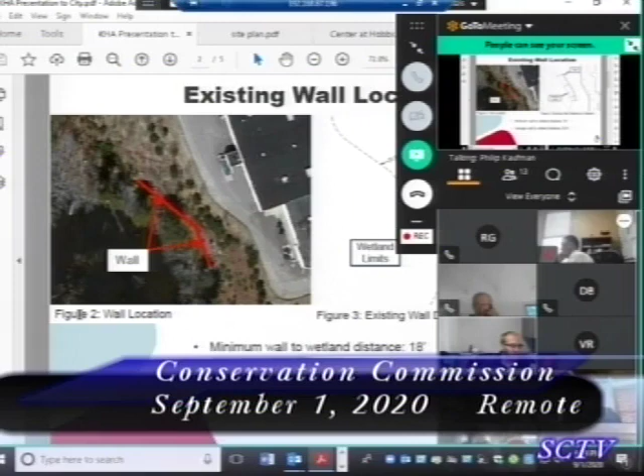So we had one of our biologists in the Northeast go out and actually flag. Those flags still exist there today. This was only done a couple weeks ago. And what we found is that, of course, the wetlands vary in shape and their relation to the wall, but in the absolute pinch point, which is towards the bottom, the second to lowest dimension there, there's about 18 feet today from the edge of wetlands to the face of the wall. And of course, that is the pinch point, right? So it certainly gets larger to 29, 32 feet. So what we found is that our minimum wall distance under existing conditions is 18 feet, and our average wall distance to wetland is 23 and a half feet. Moving forward.

So we wanted to go over some background first, and maybe this is slightly out of order because the next slide is really going to go over our proposed wall, the design, the construction, things like that, and the last two slides. But without giving it away, at the next slide, I'm going to turn it over to the GCS team to do a more thorough explanation of the type of wall we're proposing. But what I wanted to show here is, and again, we'll explain this in just a minute, the type of wall and what it's going to look like.

But essentially, we're going to be building a new proposed wall 10 feet in front of the existing wall. And so, where we had 18 feet from the wall to the wetlands in existing conditions, simple math, subtract 10 feet. Our new minimum is going to be 8 feet, and that average, as opposed to 23 or whatever it was, is going to be 13.

But the other thing we really want to point out, and the message we want to send with this one, is that as we do the construction and installation of this new wall, we have some really nice photos in the last slide that show that all of the construction equipment and vehicles are going to be on the, I guess, east or plan right side of the wall. So as they're building up walls, the construction equipment is going to be in that space in between the two walls.

And why that's really important is because the actual room that we need for constructability and for our equipment between the wall and the wetland is very, very minimal. It's only a 5-foot buffer that we're going to need in front of the wall, meaning that if the commission is okay with our design and open to the wall that we're proposing here, we feel very comfortably that we will not actually impact the wetlands physically during construction, and that we would have a minimum space of 3 feet beyond construction, but really closer to 8.5, 9, and more feet in the vast majority, the average being 8.5 feet.

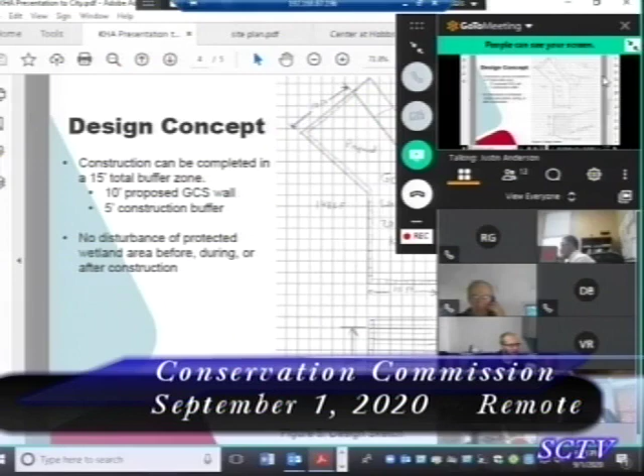So it's pretty simple. We can do it in lots of different weather conditions. It involves a basic 3-step process. You lay a layer of geotextile down, put a block near the edge, and then backfill with stone, and then compact with either a roller or plate compactor or some other equipment, and do that in 8-inch lifts as you come all the way up to the full height of construction.

So we were able to do these in pretty confined spaces, and I think the design would lend itself to being able to work in a very tight footprint, and I think we're limiting ourselves to about 15 feet to give ourselves a little safety factor against the edge of wetlands that Kimley Horn mapped. So, does it step back as it comes up, Justin? Only slightly. We can almost build these straight vertical. We can step them back slightly, but it's very slight. Okay.

So we wanted to certainly take questions, but just to provide just a tiny bit more context. So the goal here is to make sure before we jump in and spend a lot of time and effort putting together actual design and permit drawings to formally submit to the commission and to the city, we really wanted to gauge thoughts, answer questions, make sure that we collectively as a group today have at least some element of comfort that we're okay with what we're proposing here, the distance to the wetlands.

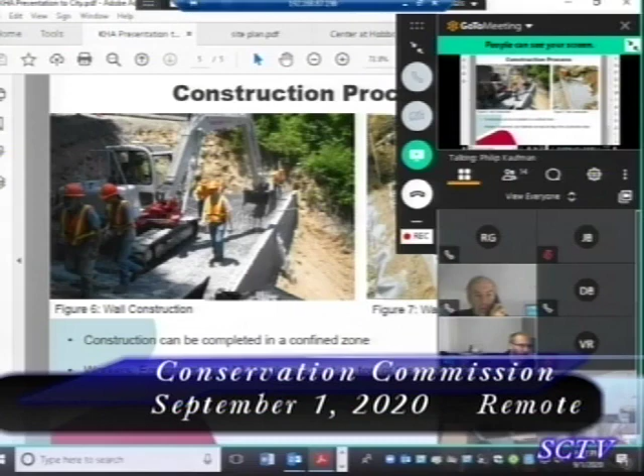Okay, this is Ed Goodwin. Couple of questions. Now, this isn't going to expand into additional parking space, yes or no? It's not. If Rebecca wants to go up a couple, we've got the parking area. Yeah, so this one right here. Where we're showing the existing wall, those 2 or 3 lines further to the right, you see all those circles with the D and the S. Those are utilities. The 2 lines to the left of those D and S, that's our current curb line. Then there's a guardrail, the line with the little circles. Everything we're talking about is well beyond any of the parking or structures or existing developed area.

The footing will be 6 feet in the ground? 4 feet? How deep will the footing be dug for this? How deep do you guys go, Justin? I want to say it was 4 feet. We'll set that so it won't be impacted by frost heave. I don't remember exactly, but I believe it was something along those lines. Okay, how wide would that be, Justin? I think it was 10-foot wide. It's the full width of the wall. 10 foot wide? Okay. All right, when will you guys be coming back with a final plan?

So because we did have a couple options, and I mean truly a couple, we had the two options for Rebecca. It was actually at her recommendation and suggestion that we go and vet them on our side and really figure out which one we think would be best suited to design and install here. So this is that.

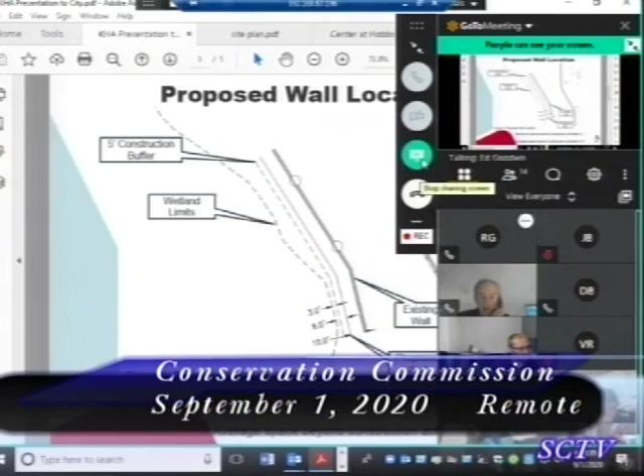Yeah, and if you have questions on detail, Becky can schedule it so you have more time. All you have to do is come back with proposals that you could be looking at, and we can discuss. It's just this is supposed to be a 5-minute walk-in section, 5 minutes for whoever comes in. It's been a half an hour. All right, okay, I appreciate it. I'll work with Becky and we'll get that scheduled.

Thanks a lot, guys. Thanks for bringing it in, and we look forward to working further with you. Thank you. Thank you.

All right, we are now, Becky, at 6:15, 152 Lake Road. Request for determination of applicability. C. Callahan, owner. Jay Dubois of DC Engineering and Survey, Inc., representative. Paver patio, fire pit, and sitting walls. All right. Becky, you want to start off? Yep, I will. Let me just share my screen.

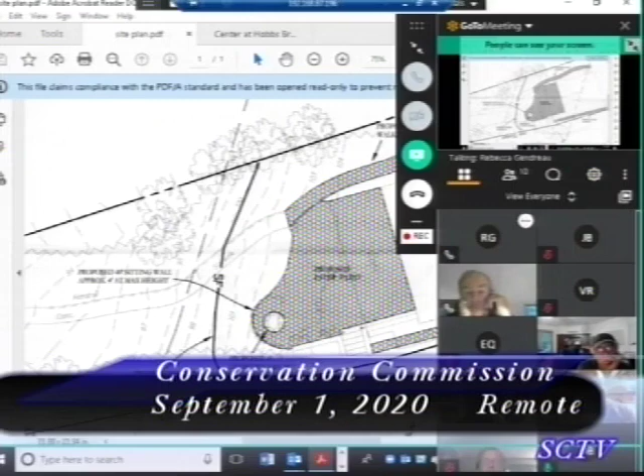And for this, I would recommend a positive 2B, as we're not doing any resource area approval. A positive number 5, being that it's subject to our local bylaw with conditions, and a negative number 3. It is work within the buffer zone, but will not alter the resource area, and an NOI would not be required for the work. So with that, I would just recommend our typical pre-construction conditions, being an erosion control check, meeting with the contractor prior to start of work, and then having the erosion controls in place for the duration of work.

All right. David Barnacle? Jason, how much excavation is going to be needed in order to put in these pavers? Basically, they're just going to scrub out what's there now. I believe there's some gravel areas. I'm not exactly sure if there's any pavers currently, but they're basically just going to take out maybe 6 inches and then replace it with good compaction gravel. And then they'll just put the pavers down on the appropriate either sand or stone dust. And so that material will be moved off-site? Yes. Any excess material will be just taken away.

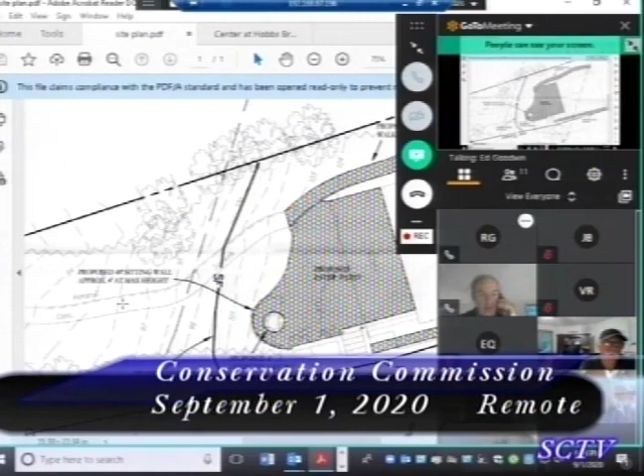We're going to ask if there's any public comment, if you're ready. All right, any further comment from the board? We'll go to the public. Jeff, could you see if there's anybody on the line for 152 Lake Road? Is there any public on the line for the public hearing for 152 Lake Road? Any public comment for 152 Lake Road? No public. No public. Do I have a motion to close the public hearing? Mr. Chairman, I'd like to make a motion to close the public hearing. This is David Barnacle. Do I have a second? I'll second that. This is Steve Halterman.

Discussion? All in favor? David Barnacle? Stephen Chidester? Stephen Chidester in favor. Eric Gaspar? Eric Gaspar in favor. Steve Halterman? Steve Halterman in favor. Ed Goodwin in favor. All right, now we have a motion.

Mr. Chairman, I'd like to make a motion that we approve the request for determination of applicability for 152 Lake Road, and as indicated by the agent, that it be a positive 5 - 3. And that's David Barnacle, and do I have a second? Eric Gaspar, second. Any discussion? Seeing no discussion. Mr. Chairman, you need to add a positive 2B to that motion. Amended. Positive 5, number 5, and it says you have a positive 2B. Right. But it wasn't part of the motion. Sorry. I didn't hear it. All right.

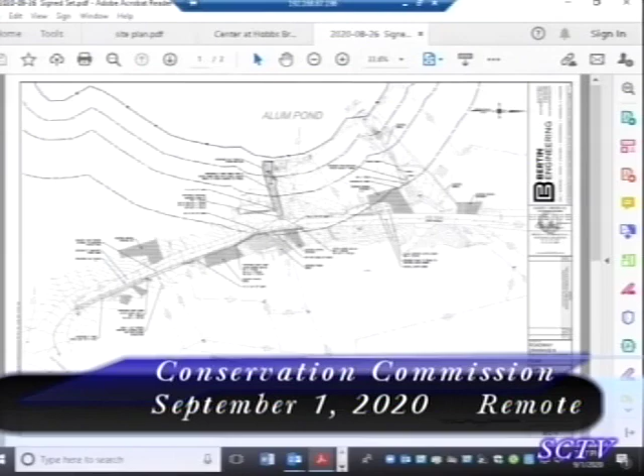I'm going to put the plan up and let the team go over it. There were only minor modifications, I think it was just erosion controls, but I'll let the project team go over some of the stormwater stuff for the commission. I did draft a permit in anticipation that you might potentially be approving the project, so that was provided in advance for your review and approval. So let me share my screen.

Calista, are you on there? Do you want to go over this now? Sure, I'm here. Do you hear me? Yep, very well. Calista, how are you doing? Good, I'm fine. How are you? Good.

Hi. So I discussed this last time. Not much has changed, except we did add some erosion control, and we did provide some drainage calculations. If you'd like, I can go over it again. Starting at the lower left corner, we're introducing a grass swale along the road that would discharge into a catch basin. Then we pipe it from there into another catch basin, which will pick up an additional part of the road, and then take the drainage across the street to a grass swale.

And in that grass swale, we'll have a couple of check dams. There's another inlet further down the road, say in the middle of the page, with another catch basin to collect runoff and discharge to that grass swale. So those three catch basins will be removing suspended solids, as well as the grass swale with the check dams will be removing it. And then further to the right, there's an existing catch basin.

We're going to regrade the road a little bit to make sure the drainage gets there, and it discharges to an existing depression, say a grass swale. It's really a gravel depression that has silted up. We'll clean that up, put a check dam in it, and obviously now it's working to remove sediment, and with the check dam, it'll remove more. So that's basically the plan.

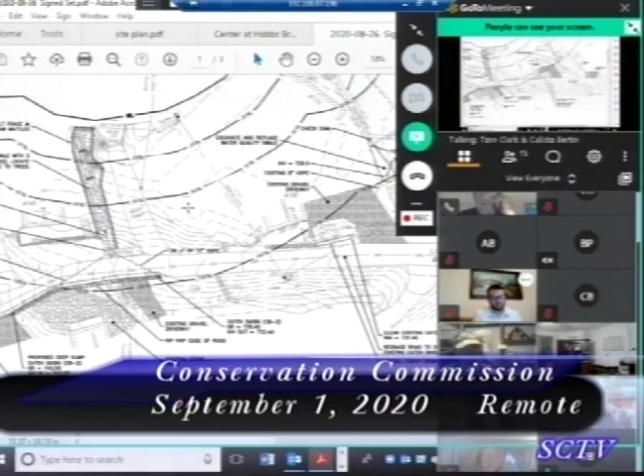Calista, when would it start and when would it end? What are we looking at for a timetable? Yeah, they're ready to start. Oh, Peter, go ahead. Okay, Tom, go ahead. All right. Basically, the contractor's schedule is late September, early October. And we plan to do this when the lake has started to be dropped down and the traffic in the area is minimal. And also to address the tree removal, I have had the contractor look at it.

They're going to try to do it without removing any of the pine trees. There was one tree that may get hit a little bit by hitting the root structure. But other than that, we're going to try to minimize any tree removal. Okay, great.

Is there anybody in the audience who would like to speak? Holly? Oh, Steve, I'm sorry, Steve. Oh, Steve, I missed you. You're right next to Eric. But I do have another comment based on this. Oh, you have another comment?

Go ahead. Yeah, based on this impact of the roots. I mean, we know very well that could kill the tree. So, a few years down the road, the tree's dead, and we're back addressing that. So, I'm just a little concerned about that. It might be better, if they're going to damage the roots, to remove the tree and plant another one. There are a lot of trees down there.

This is Tom Clark, and I agree. The contractor thought he had enough 4-foot boundary on one side of the one tree that's very close to the swale. So we're going to look at it as he gets into the digging. If it's a big root structure, we'll take the tree down and replant some trees. That was my only other comment. I'm good. Yep. Okay.

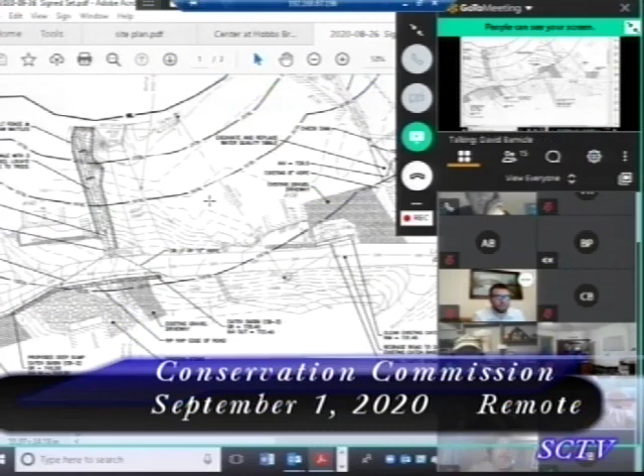No public. Thank you. All right. Do I have a motion to close the public hearing? Chairman, David so moved. Steve Halterman. Steve Halterman, okay. David, second? Yes. All right. Discussion? All in favor of closing the public hearing?

Mr. Halterman? Steve Halterman in favor. David Barnacle? David Barnacle in favor. Eric Gaspar? Eric Gaspar in favor. Stephen Chidester? Stephen Chidester in favor. And Ed Goodwin in favor.

Do I have a motion? Make a motion that we approve the notice of intent, DEP file number 300-1067, with appropriate relative order of conditions as indicated by the agent. And this is David Barnacle. Do I have a second? Eric Gaspar, second. A second with Eric Gaspar. Any further discussion?

Oh, you moved, huh? Did you change seats?

Is there any discussion? Seeing none. All in favor? Eric? You're still first. Eric Gaspar in favor. Okay. Stephen Chidester? Stephen Chidester in favor. Steve Halterman. Steve Halterman in favor. David Barnacle. David Barnacle in favor. And Ed Goodwin in favor. Thank you very much, gentlemen. Thank you. Yeah, nicely done.

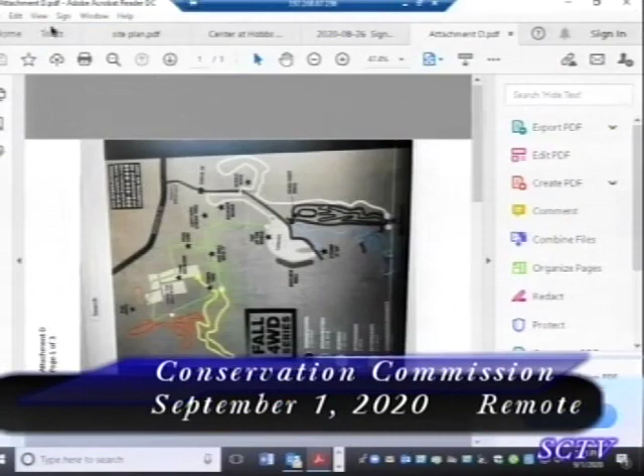So I'm not sure how that fits in. If there's a comment that Becky has some information that people have been using motorized vehicles in the wetlands areas, then I'd like to hear that and see the documentation for that. That would be news to me. And I suspect that if she had that, we would be hearing about it. So there's a lot of rumor mongering that's going on. And no.

Yeah. Do you have Google? If you just go in and Google 508 and look at the red trail and listen to what they say as they ride around in their Jeeps, and if you take a walk on the red trail. When was this information posted? Is this from 2 years ago? I'm going to guess it was, well, I don't know the date of the post. I would say it's probably a year old.

No, there was in fact an activity that included Jeeps on August 1st of 2020. August 1st of 2020, last month? Yeah, you can see it on YouTube. Well, I'm not sure with the YouTube video how you can tell actually where you are if somebody's in a Jeep. But is it in the wetlands area, around the telephone bridge? Yep. He saw where we walked.

Mr. Chairman? Go ahead. I think we're getting off the track. Becky has made a list of what has not been provided to us. If there's a moving target, it's not us that's moving it. It's the target that's moving with new information. So we have a recommendation. Do we have any plans of a bridge? Yeah. Glenn, do we have any plans for a bridge that we can bring up on the screen?

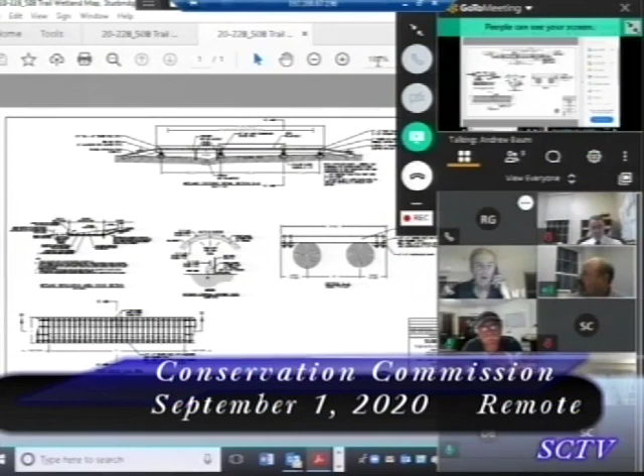I'm just not clear about wetland restoration area for impact, if they've met all of that. So if we're taking into account the revised footings, if that's all been accounted for with the revised replication. Mr. Chairman, if you go to page 1 on the notes on the top, there's a note section that says required replication area, and that breaks down all the components that are proposed. And that's been updated since the last one? With the square footage. Yes, yep.

Glenn Kowalski, if I could speak to the replication area, it's only where we're putting the footing down, as required under the 1053 clause for footbridges. And we chose an area that appeared that the original farmer had filled in. And when we went through the soil, approximately 1 foot of gravelly material, then we hit the original A horizon. And the area that we chose would be flooded by the regular stream and the flooding of that wetland system. And we had gone with the bylaw requirement, of course, for one replication.

I glanced at it when we were at the site inspection. There's that multiflora rose sitting in the middle of it. It would match what the existing red maple swamp would look like, planting the same as the red maple shrub swamp. That's all for that. Mr. Barnacle? Sir. Comments? None. Eric?

Yeah, I'm just happy that there was finally something that we could actually work with on site and look at the plan as it is. I'm not at all happy as to how this has come together, but I'm fairly confident with having Andy put together the plans as they have been, and that's been an improvement. So I figured I would throw something positive into the ether. It needed it.

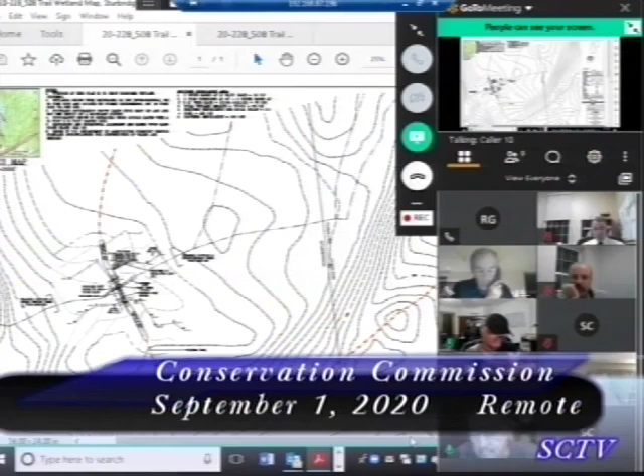So I would make that request, and I'm not sure that a denial with an immediate refiling, I don't know that that's really the best way to move forward and to get this completed.

Thank you. Board members, as I look at this bridge, and when we were out on site, this is pretty much or close to what we asked for. I think that it meets what was said out there. Eric? Yep. Steve? Did we ask for anything different than this? Well, for the bridge is fine. I think. Okay, I just want, if we're going to send it off with a continuance, I don't want to have them come back and find out that there's something that you don't like.

No. I appreciate you asking everybody. The bridge is part of it, but it's not all of it. And the information that Becky requested, and last week or the last meeting, we were ready to deny this thing, and I specifically asked for a commitment to say that by this meeting they would have everything that Becky had requested. And they committed to do that. And I said, Becky, have you given them everything? And she said yes.